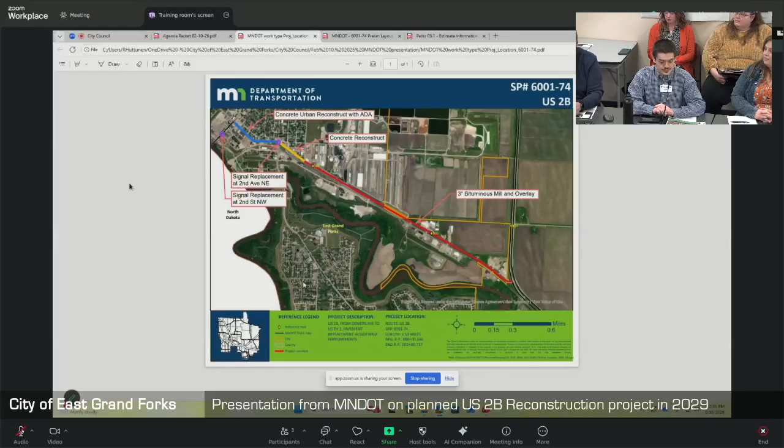There'll be a signal replacement at 2nd Avenue Northeast, a signal replacement at 2nd Street Northwest, a full concrete reconstruct on the west, including new sidewalks and new storm sewer. The yellow portion is a concrete reconstruct, so that'll be storm sewer and driving surface but not sidewalks. The red portion is a 3-inch bituminous mill and overlay, just freshening up the pavement surface but not changing anything underneath. So that's a really quick overview of what the project is and where it is.

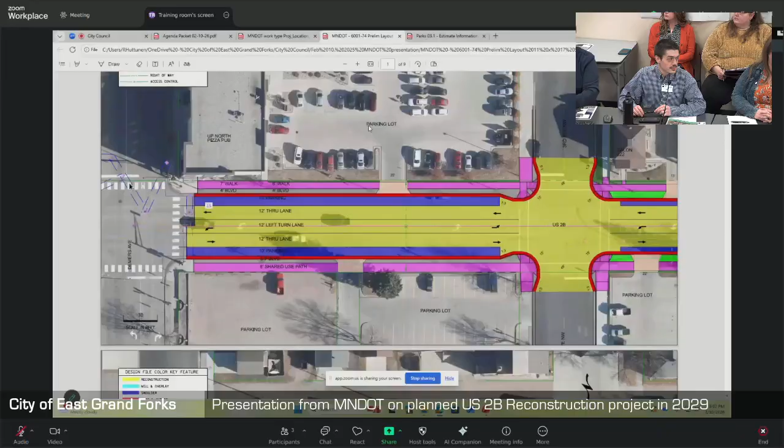And then we'll switch over to our layout. So this is what we have drawn up for the proposed changes, overviewed with the existing - those are the big 11 by 17 sheets that you've got. So that's what we're planning over existing. And our main question for you is parking.

Right now we're planning on keeping parking between Demers and 3rd, and everything east of that, parking would be removed. The reason we were looking at that is it doesn't seem like there's a ton of use of the existing parking, and it would also be a cost savings to the city because MnDOT does charge 10% currently of the width of parking.

So that was one of the main reasons for removing parking. We were also working with our Americans with Disabilities group. They recommended having shorter crossings since it's a school zone. So that was another reason we looked at removing parking. Our main hope is to get some feedback.

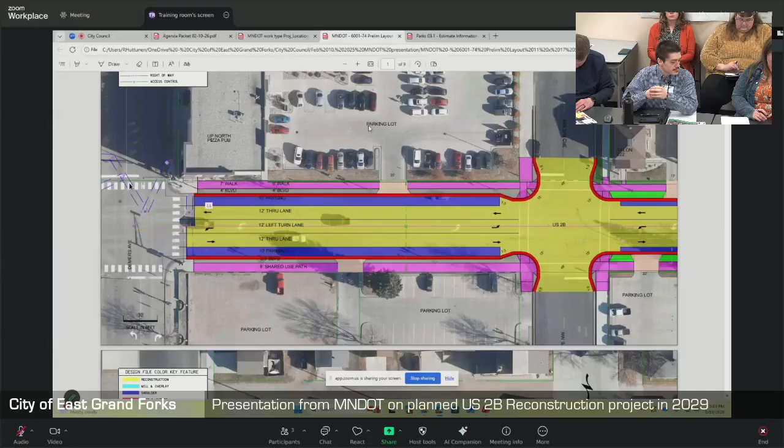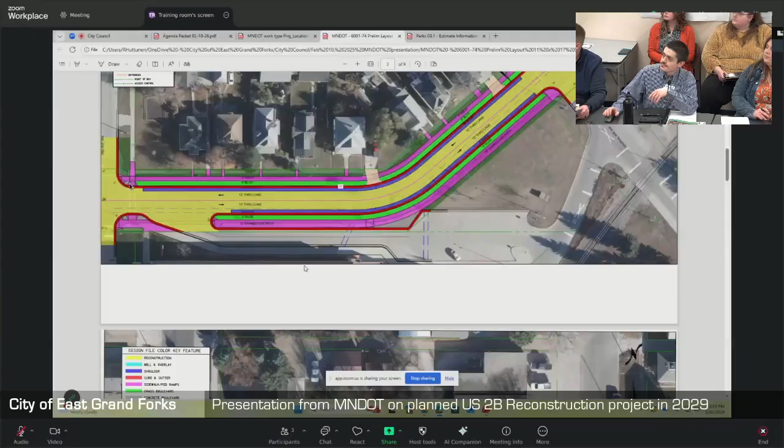We also wanted to put in the multi-use path in front of the Sacred Heart School. Currently there is no sidewalk facility there - it just ends right at the school, and we're running that now all the way to the signal. It'll stop at 2nd Avenue and then connect into the city street for the community north of Highway 2B.

So that was another reason we wanted to remove parking on the south side specifically, to ensure we had the space within our existing right-of-way to accommodate that school zone.

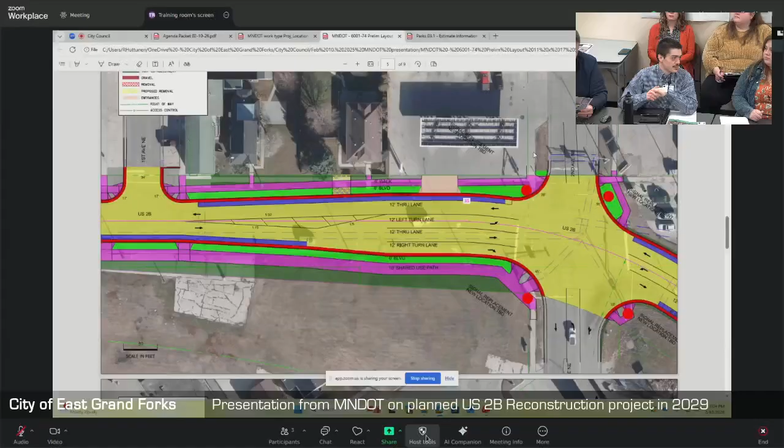So I guess my question for the city council is: is parking important on the north side of the road? Is that something we should look at keeping? We're pretty set on removing parking on the south side because we need that space to put in the trail for the school. But the main reason for us wanting to be here was to get your thoughts on how much parking is used on the north side of the road and whether we should include it or not.

So I guess, Abby, I don't know if you had anything you wanted to run through with the layout itself. Sure. As Josh mentioned, from Demers to 3rd we're maintaining the existing cross section, except on the south side it would go to an 8-foot shared use path. So the boulevard would narrow up, which might require some profile changes of the trunk highway. But we are planning to tie back in at Demers to the existing profile.

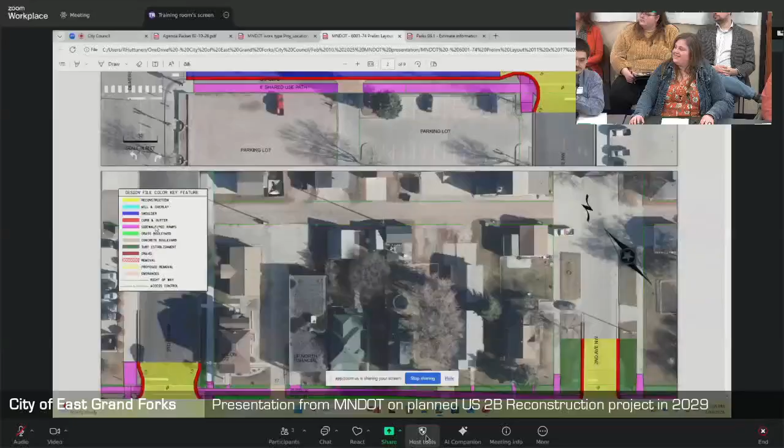From 3rd going east, we would be putting back a 6-foot walk with a 6-foot boulevard. This green space behind the walk is our existing right-of-way limits, so that's another conversation less important for our road design, but something for you all to keep in mind. If you wanted trees, they could fit behind that sidewalk in MnDOT right-of-way. And on the south side to 2nd Avenue - is it northeast or northwest?

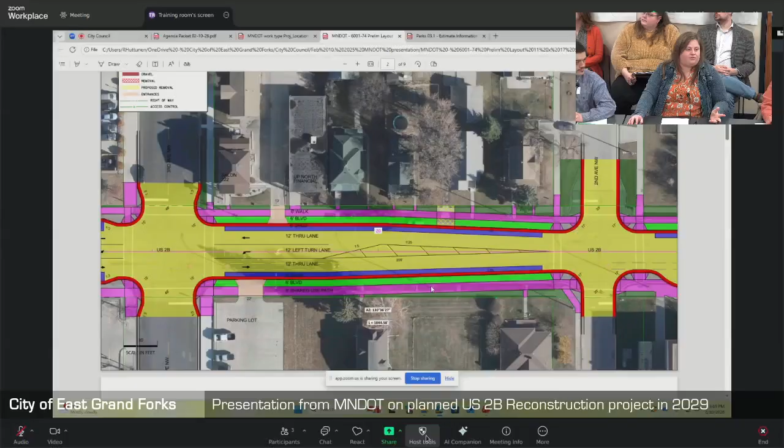Northeast, it's still an 8-foot shared use path. We just couldn't fit the 10-foot path in that segment. But then from 2nd to 2nd, it goes to a 10-foot shared use path, which is our preferred width if we can make it fit, and was requested by the school.

So that was what led us down that path. And as Josh mentioned, it wraps all the way to the signal. We were in frequent contact with the school, and they shared that they don't really see any parking on their side of the road, so we were pretty confident that would be a good fit. But then on the north side, all the imagery we have does show like 1 or 2 cars parked. Some other city staff that Josh had spoken to shared that they didn't see a huge need there.

So we could go either way on it. We're not strongly for removing or for keeping. The city council's opinion would be greatly valued so we can move forward with the correct design and avoid as much rework as possible.

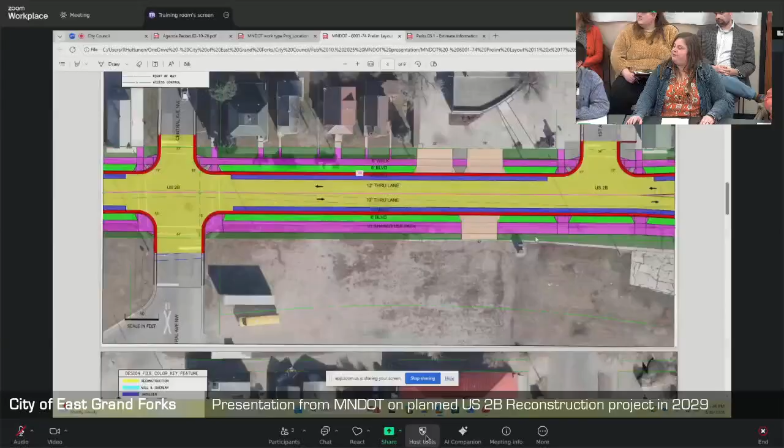So yeah, then from 2nd to 5th would still be a reconstruct, but we were not planning any pedestrian facilities in that highway segment. So it would narrow. There would not be parking, but there also wouldn't be walk added.